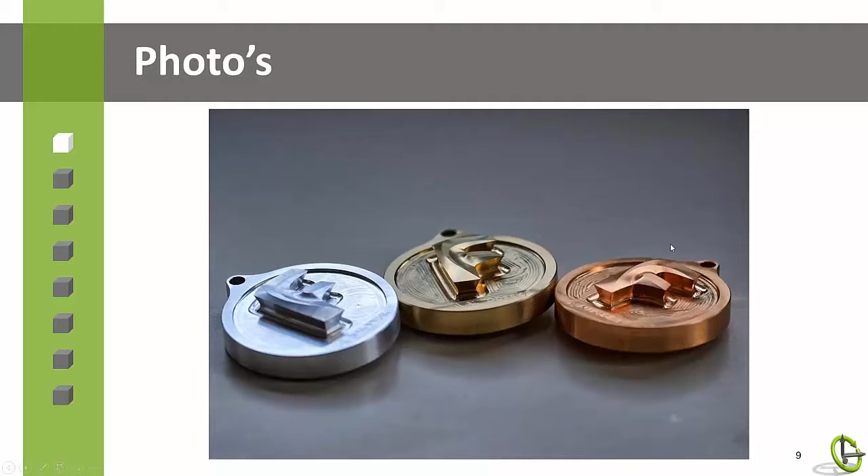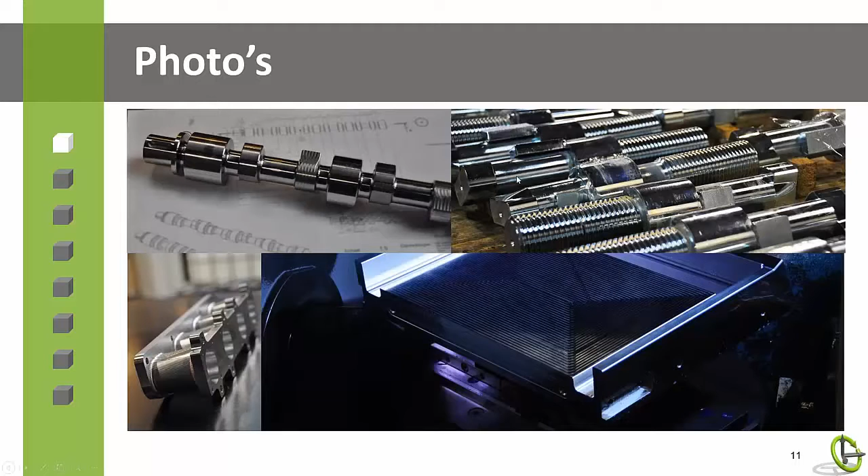You might find that weird, but they usually do anything to get a discount. So if you say, I will make it for you for a slightly lower price, but I want to be able to show it to the world, they tend to say yes quite easily, whereas others are way more scared of their products being shown. So that's why you see a lot of motorsport items here. But we make a ton of different stuff as well, some of which you see here at the bottom right hand corner. That's totally not motorsport. It's a part for the offshore. What they're going to do, I've got no clue, but they wanted it like this, so we made it.

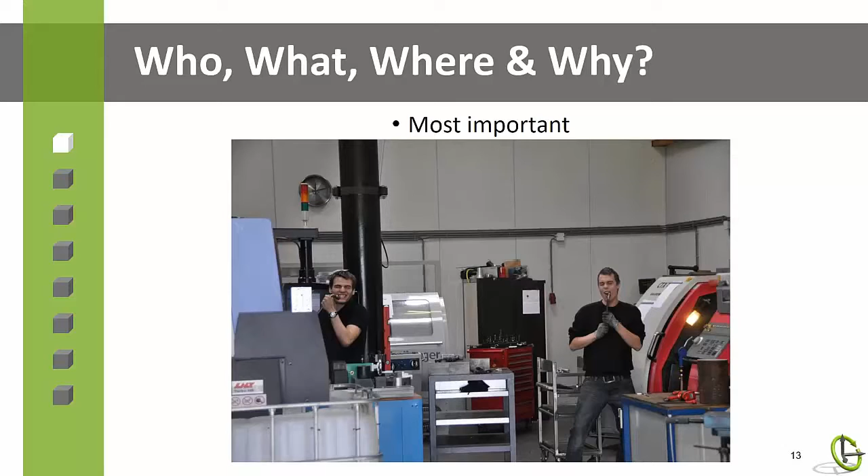But in the end, it's not about what you make or what you do, but having fun. So you see me here on the left, and one of my colleagues, Mark, here on the right, in the old shop, singing when the radio was on, and it really shows what we try and do. It's not all about work, but it's about having fun while doing it. So we actually all like to go to work in the morning. Of course, there are days where it's hard to get up, but it's more than just work for us usually.

So, on to the actual stuff that most of you came here for. So, let's do it. All right.

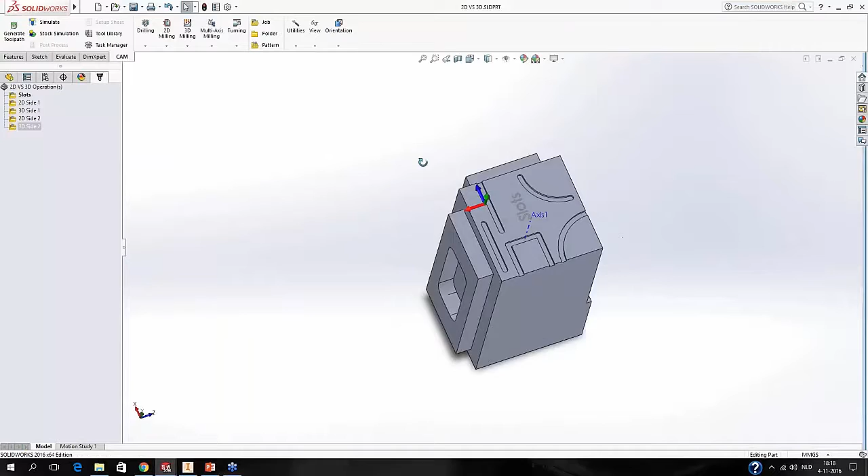Everyone's gonna see slots when they start making parts, and they tend to change a lot for what kind of products you're making. But I try to pick some on how we could program them. Of course, there's this slotting operation we've got, and we'll select the tool. I've tested it before, so that's why the tool's already the correct one. We just hit generate, and it should be good to go. This is an easy one, most people will understand, and I think it's just a very good operation.

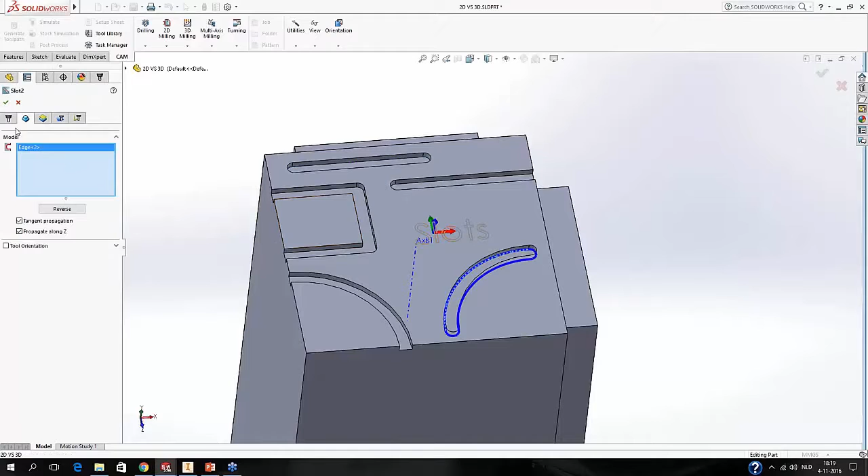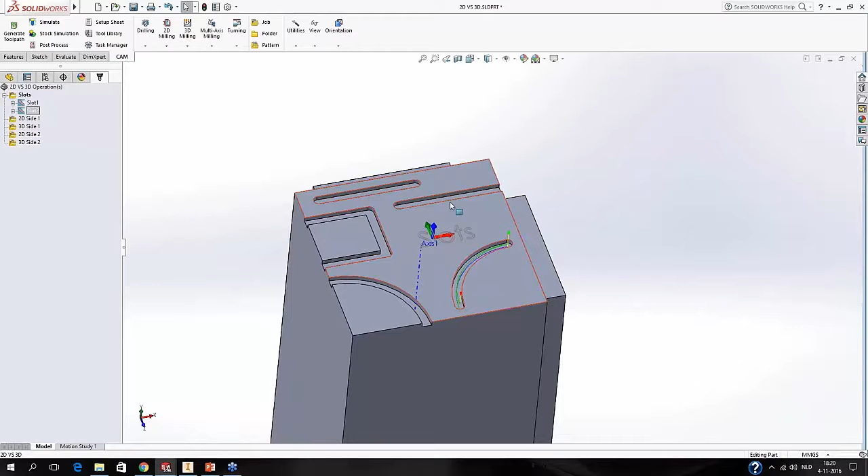Now, if we want to make this curved slot, you might think, is this going to work? Of course it is. So we're going to try and make that one. The selections are a little different between HSMWorks and Inventor HSM, but usually the workflow is kind of the same. So what you can do here in HSMWorks, which I just did, and you can also do in Inventor HSM, I believe, is use a way to duplicate it, which has got a shortcut here, and that way you can make the same operation again, and usually I have to change the selections and have a ready operation.

From here on, the slots get a little more tricky. We've got an open one right here, and this is something that requires some knowledge to create well. Some users might say, I'm going to use a 2D contour for this. You can, because that's the easiest way to hack yourself to the correct toolpath. But actually, the slotting operation is much smarter than you might expect.

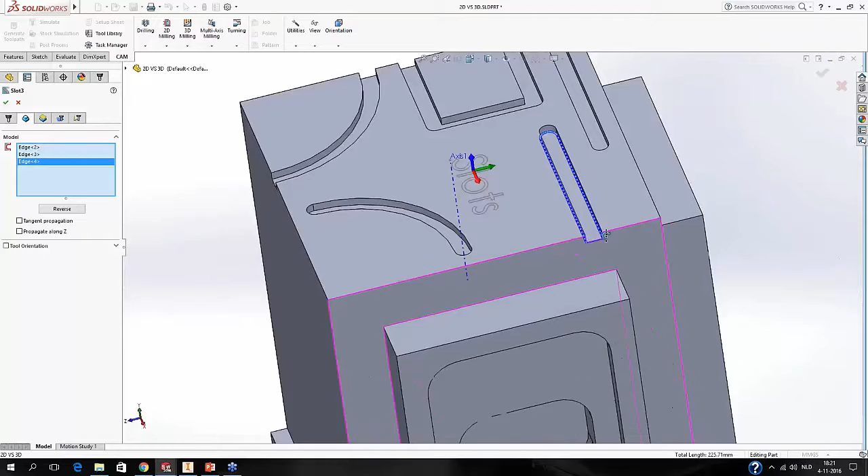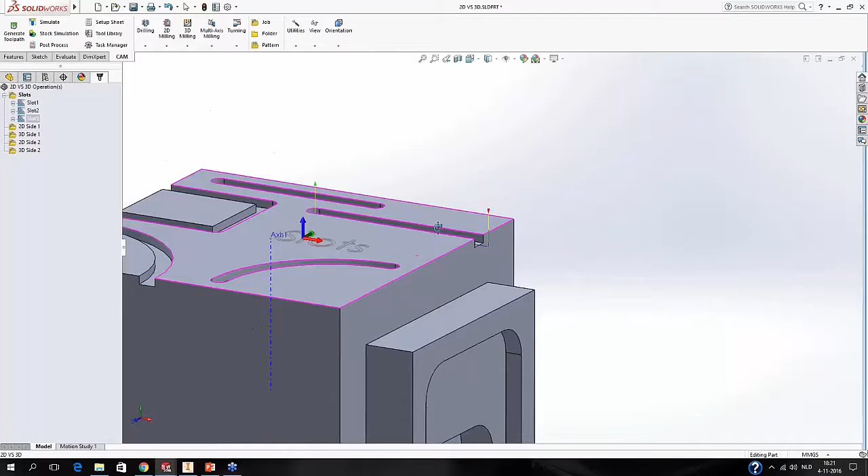And what happens here with the selection, if you take this one away, we'll turn these two off, and we'll select this one edge, the one over here, and the one over here. You'll see these 3 lines that I clicked have gotten a little thicker, and there's a small blue line here on the end of the slot, and it shows how it closed the slot for us. If we press the green button right now, the slot will actually generate and will understand that it's an open slot, and it can just plunge right in, cut to the end, and come back up again on the other side. So a real easy way to get this open slot.

It also works in Inventor right now, but there's a small catch, since if you regenerate it afterwards, the system will go haywire. So that has been sent in. There is a ticket for this in the system, and the development guys will fix it. Don't expect this to be tomorrow, but it could be. It also could take some time.

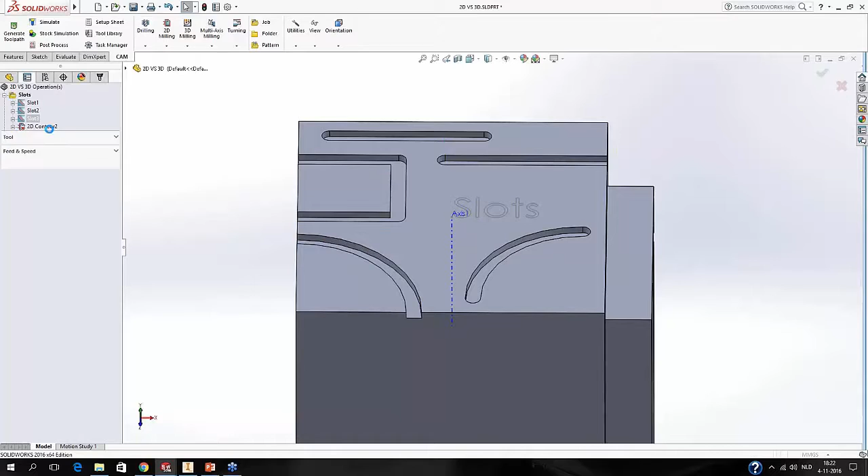Then these 3 slots we've seen right now are quite easy to program, and they're also easy to do in your mind. But these ones, this one and this one, are a little more tricky to get right. Here we are going to use a 2D contour, and still the same tool, that's all fine. We're going to click one of those edges. If we do that right now, we get the full slot, which we don't need, and we've got this edge selected right now.

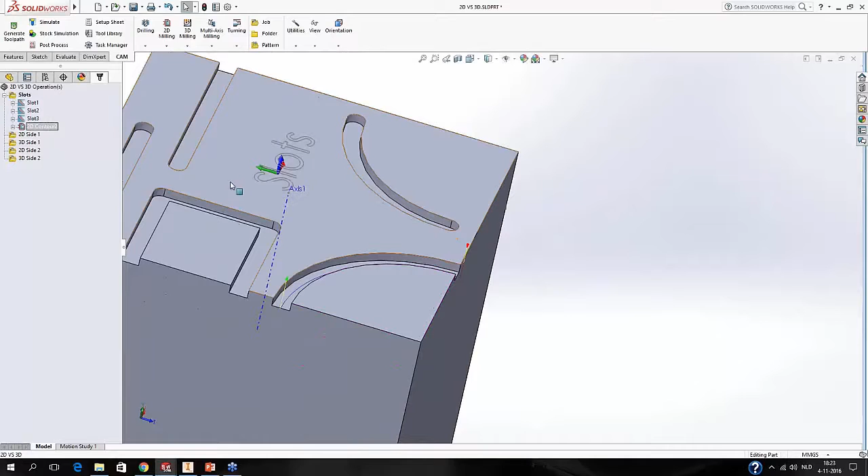To get this right, we need to turn the lead in and lead out off, or at least take this 90 degrees off. So the lead in and lead out will not cut into our actual part. Now if we do this, the actual cutting path looks quite good, but we have a problem with the tool plunging into the stock we've got, because it doesn't move out of the stock far enough before it starts the cutting. Again, there's a whole lot of ways of getting this right.

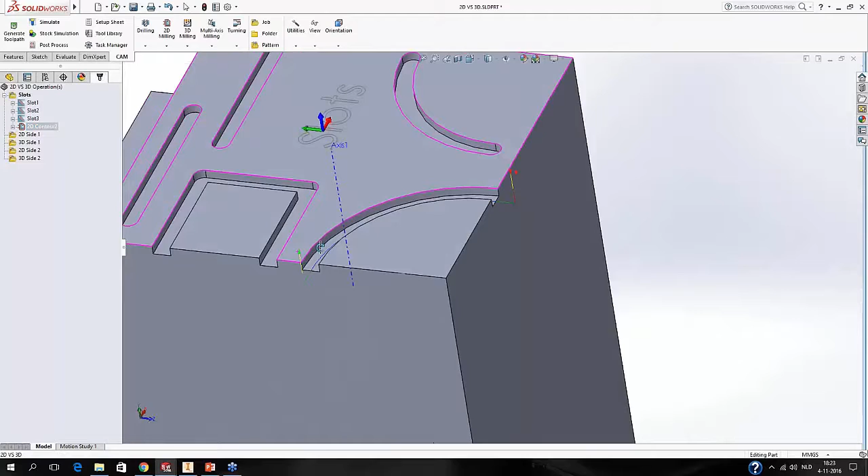We can extend the lead in this case, to 10 for example, and as it shows you right now, if we simulate this, you can see the tool starts outside of the part, cuts right in, leaves the part before it comes up. We can, but this gets a little tricky when we are not sure how much stock is left on this side. So we're going to put this back to its normal value, and we're going to turn on the stock contours. If we do this, we see this orange box which shows us the stock that has been set up in our job.

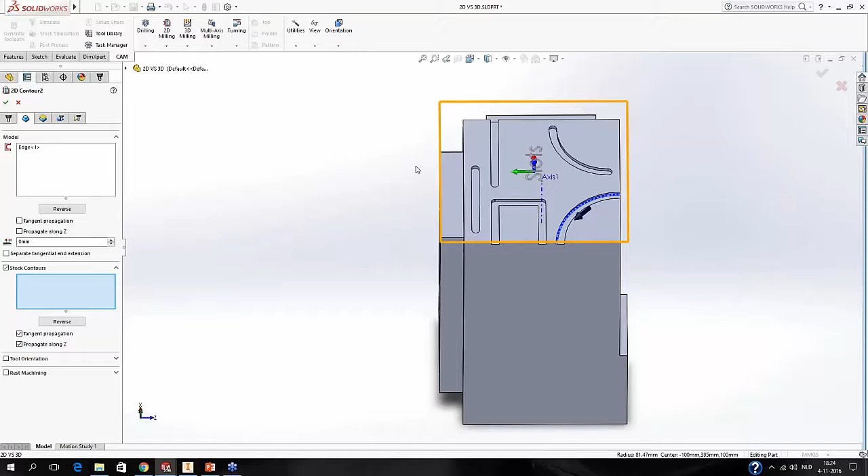This is called a job in HSMWorks and a setup in Inventor HSM, but it's the same thing. This orange box is now shown here. We can also override it when we do a selection here. That would mean this is our stock, but usually your orange box will be fine.

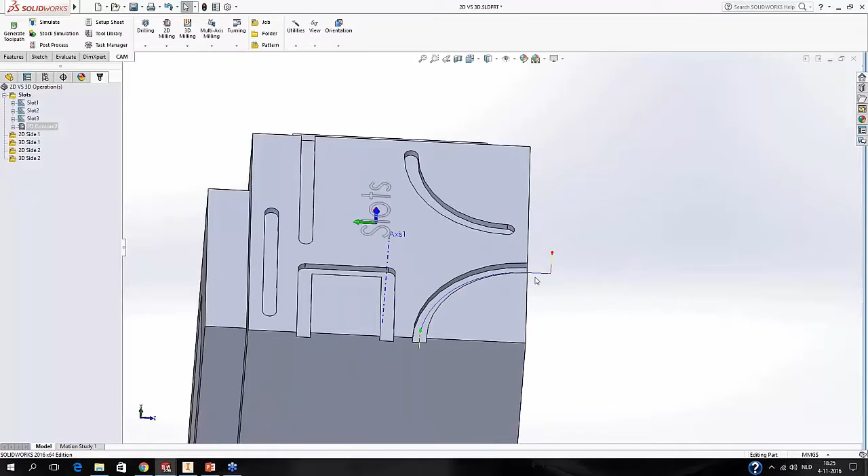If we hit the green button right now, this should all work fine, since we see now the actual cutting move is extended beyond the whole stock, and it will plunge there and come out. You see that it made more of an extension right here than on the other side. That's due to there being more stock on this side than on the other one. For now, this seems pretty easy and straightforward.

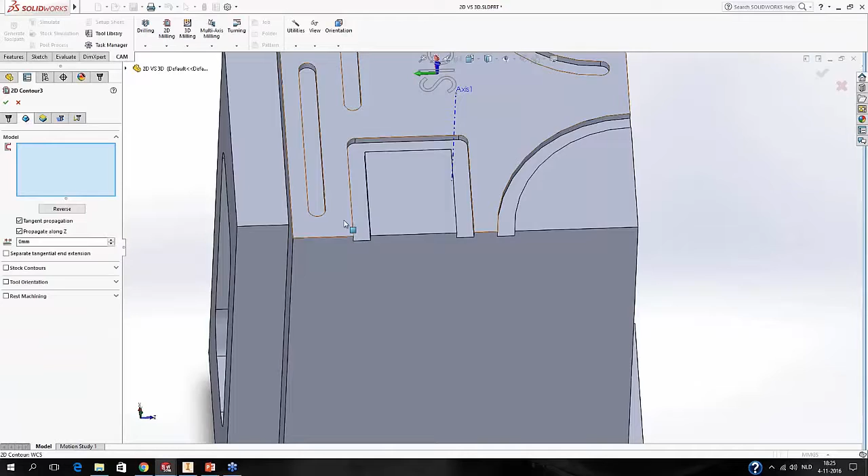Now we come to the last one, and this one is much more tricky than you might actually think. If we take a 2D contour here, and if we select this edge, we can also select the end of this line to make it stop the selection. You could think, well, if we turn on the stock contours again, it should make a fine path.

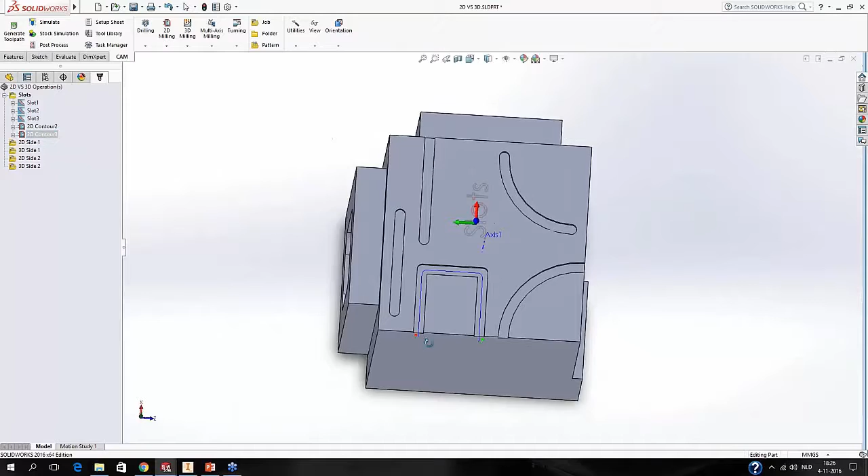Well, by the looks of it, it's pretty good. Only if we simulate it now, we will see that it plunges outside, it will cut straight in and come to the other side. This looks okay, but if we do the comparison right now, we actually see that it has left some stock here in the corners.

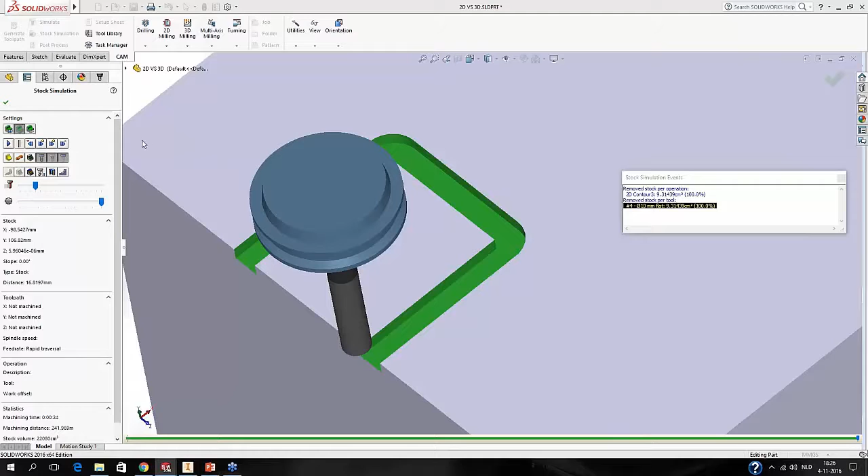If I'm going too fast with this, please tell me, because for me this is really easy and I do this every day. But you can compare the current stock that has been machined to the actual model we've got, which is what I'm doing right here. Gray is what is actually the same as the model. Blue is where there's too much stock left still, and red is where you've got into the model.

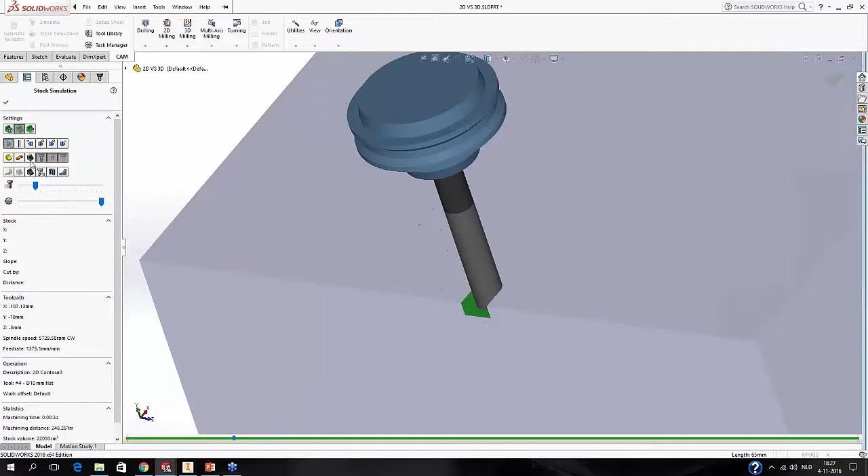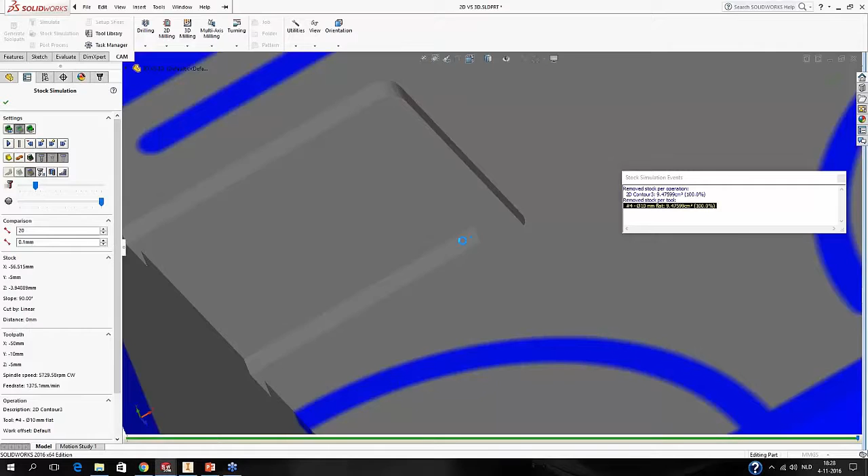So we see now we've left these corners right here. This is due to the tool running around this corner right here, and we can do a couple of things. The easiest one probably is to not select the inner edge but the outer one. And if we do this and we simulate it, you will see that now actually the corners are just gray like we want them, and the inside of this slot is still good as well. So with that in mind, it's usually easier to do just this.

Well, we could have also set the rolling around the corners off, which we can do right here. Roll around corner, and we say keep sharp corner. If we do this, we should get the same kind of path that allows us to cut this slot in one go. If we check on that, because you can also question me on if I'm right, no problem. And as you see, this is good as well.

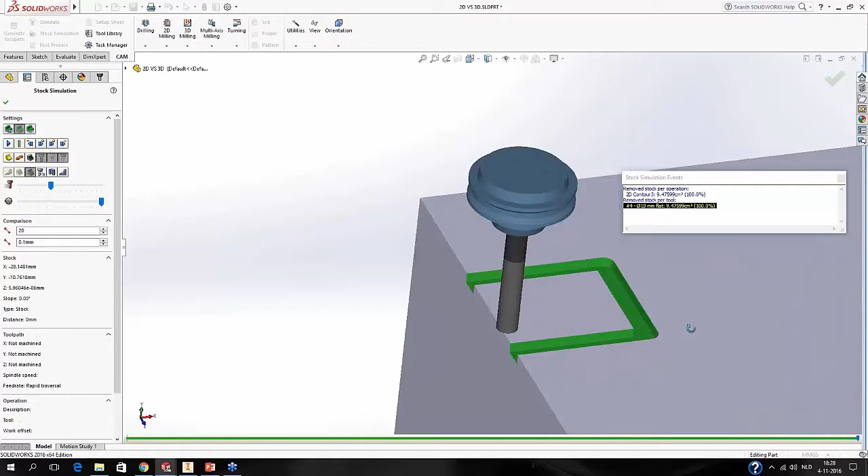Sometimes you see a little discoloration here of it being red, but that's due to the quality of our simulation and the comparison settings, which I will not go into, but you can fiddle around with them yourself. That's it for slots from me. I'm not sure if any of the guys want to interrupt me at this point.

The only thing I'll say, Lawrence, I like how you showed how you can use stock. Obviously, that's applicable to all of the 2D operations, but an often missed thing is adding the stock contours in to affect your 2D toolpath, so I'm glad you brought that up. All right.

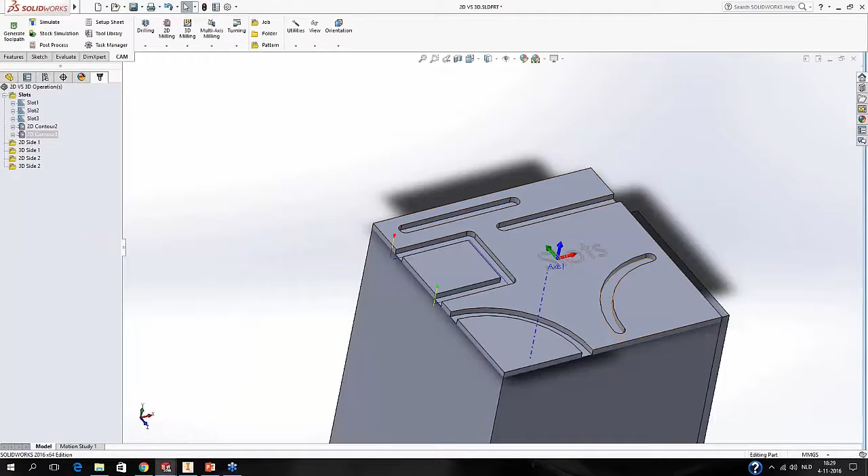I think the next thing, I didn't put it back on here again, but I'm going to explain something about the extension we can also do, which I showed you before here as well. But there's something funny about this. We can extend the toolpath if we want to. So let me create a new job. And set, this is my top. Yeah. All right.

Automatically it will set this new job we made to the default one, which we're going to put operations in, which is very convenient. It's one of the things that you don't actually see, but it's been really thought through by the development team. So let me show what I'm on about here.

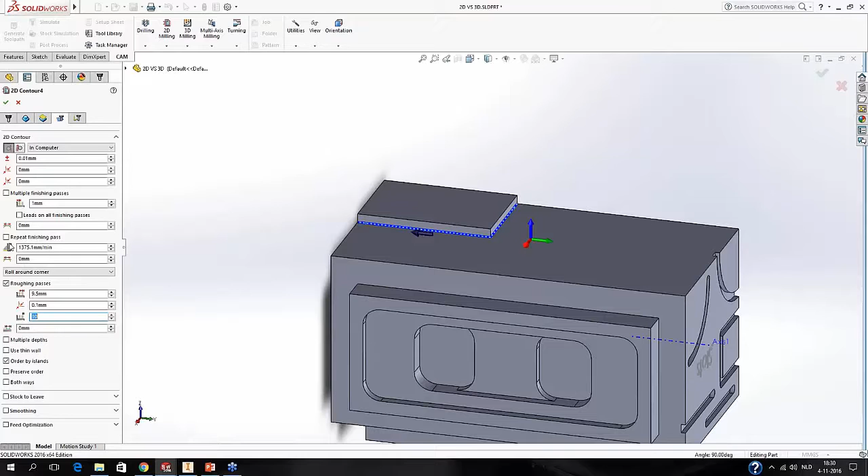What we can actually just do is create some kind of open pocket with the 2D contour here, and create some roughing passes as well. Let me first give in 10, and we can see what happens. It will just create this toolpath around the edge that I selected.

Since it keeps offsetting this part, we get these round corners here at the bottom. This is good for the actual cutting. It might look weird if you're not really used to seeing a machine run or programming, but this is actually how you want the path to look if you are using it as an open pocket.

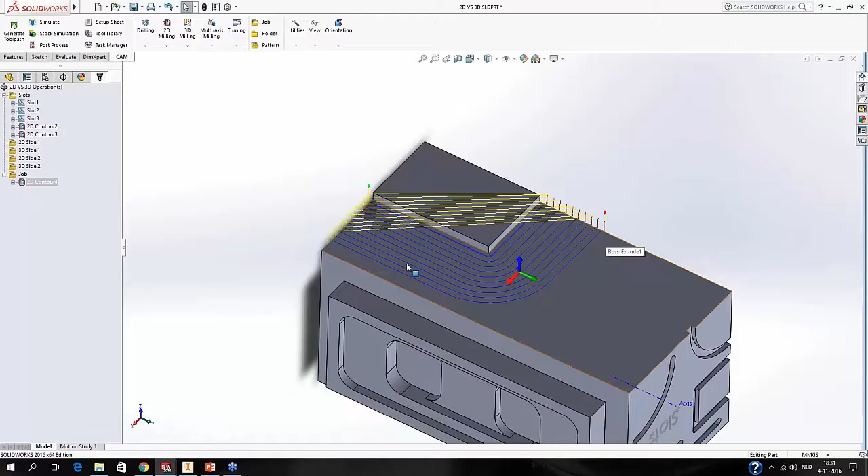Again, here we see that the tool will be plunging into our stock. If I select the job right now, you'll see this yellow box, and that's actually the stock we've given it. If we look at where the toolpath is at this very moment, this is the center of the tool that's being programmed, so we know it's going to plunge right into the stock. We can simulate that as well. And we see it will plunge straight in.

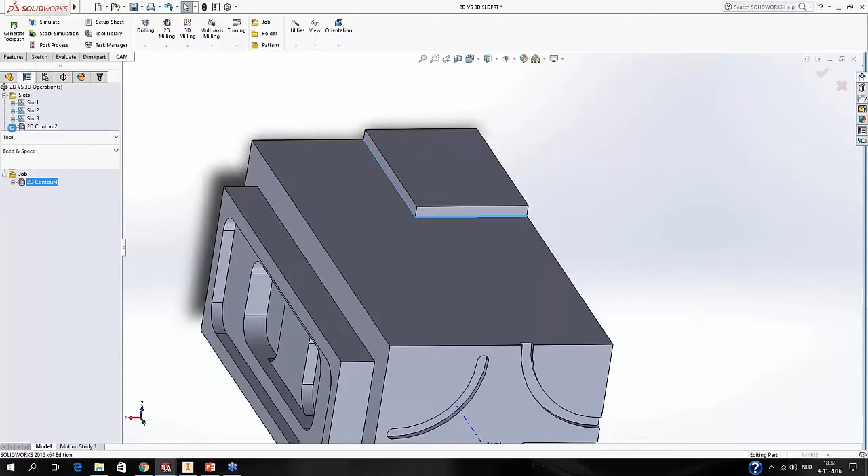Since this is not what we want, we are going to extend the toolpath. To do this, we've got here an end extension box. It will extend the toolpath, like it says, tangent to the actual move that it did at last. So if we would give in here at least half the diameter of the tool, we should be good. So the tool is 10 millimeters, so I'm going to fill in 6.

I'm sorry for you guys that I'm doing this in millimeters, but that is my world, so that's much easier for me. As you can see now, this blue line has been extended to outside of the part and outside of the stock, which we should be able to see clearly when we're doing this simulation.

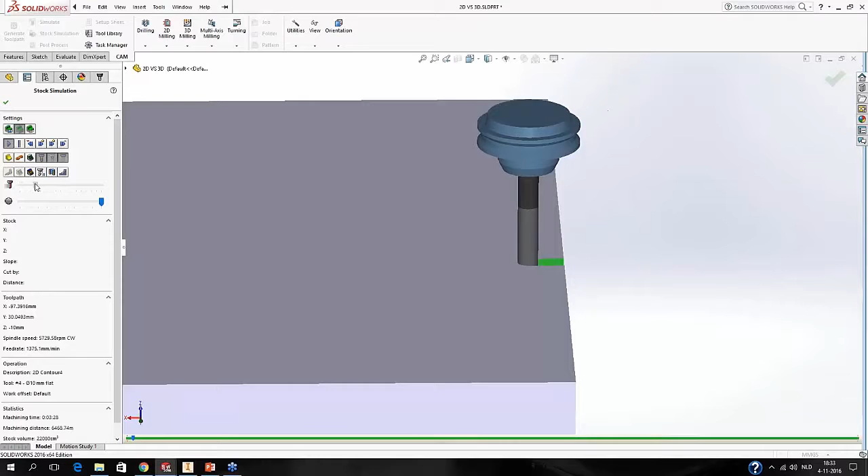As I know this is now doing something like a full slot, this is not my roughing operation. I'm just trying to show you how we could do this kind of open pocket. To do this correctly, you're going to say, yeah, but we got to machine this whole face. Now we can just say, all right, we need a lot more passes. We give this in 20. It will give me 20 passes.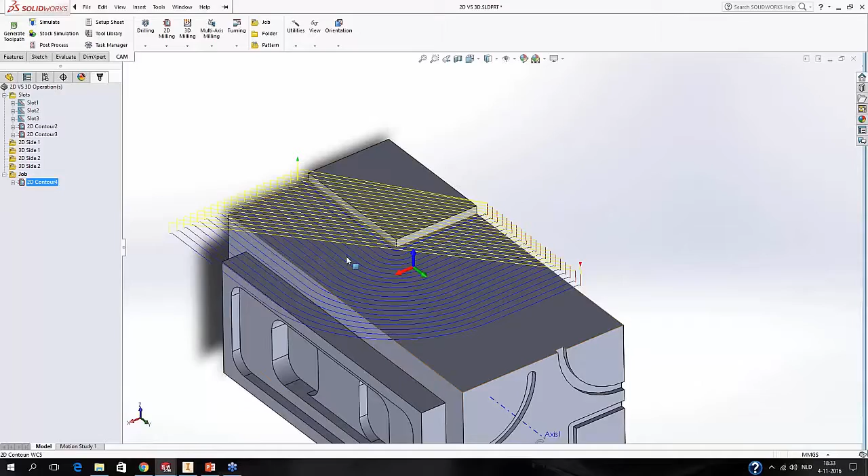This will also show you that we're cutting way too much here because it's all going to be just air. Well, it's actually going there, it's just going to cut air, which you should be able to see here. It's just moving in the air, and that's something we don't want even when we're not programming an adaptive toolpath. We never want air cuts.

So what is going to make life a whole lot easier for us is turning on the stock contours again. It's going to show you the orange box again, which is exactly the stock we've got. So this is good. To be sure, we are going to extend all the passes over the whole part here. What I usually do is just fill in something like 100.

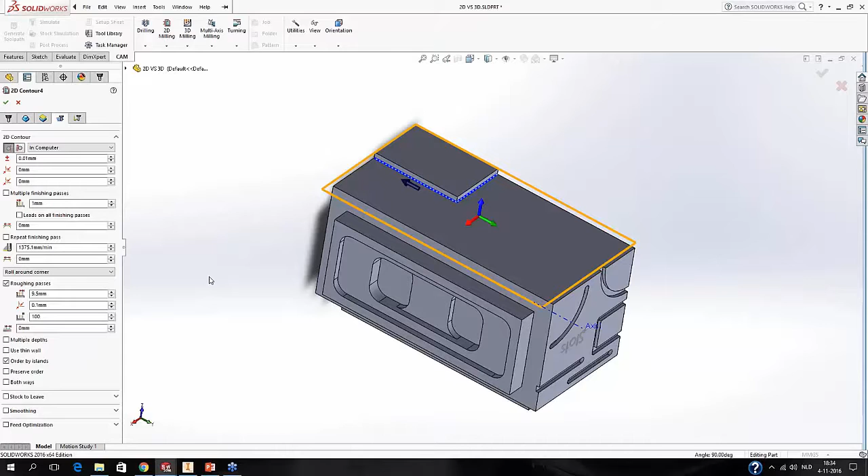My computer is a little slow since we've got the GoToMeeting open and Inventor HSM open, SolidWorks open, but usually this is not really hard on your computer and the calculation time is real short, so you don't have to be scared that you're putting in too many.

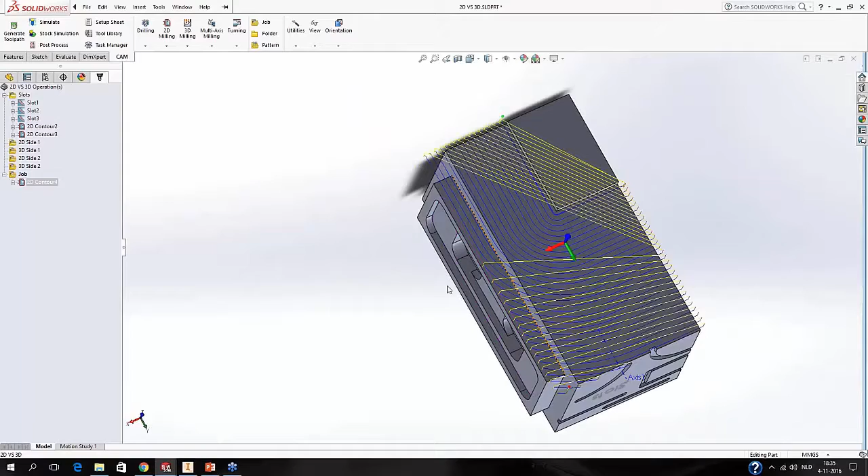As you see now, these cutting passes are cut before they start cutting air. This is something we would want in theory. Now the thing comes that in the machine this block might actually not be exactly as we've defined in our system. To prepare for that, we might say we want to extend the toolpath just like we did before, just outside of the part a little more, so we're sure it will plunge outside of the part.

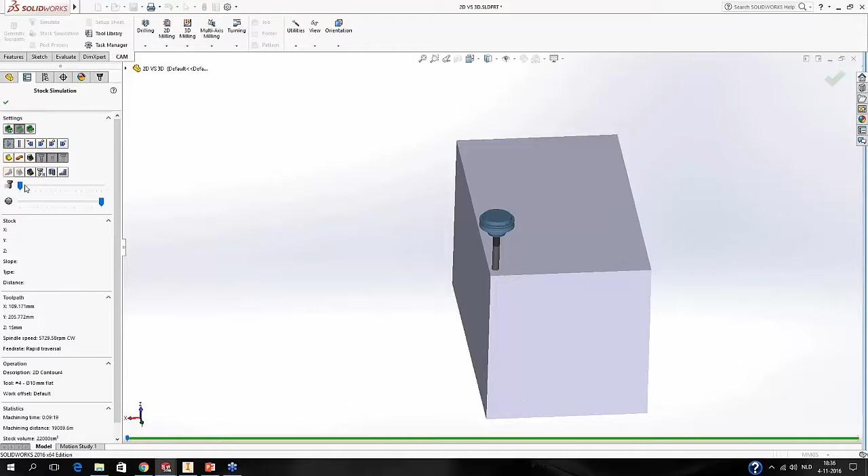Now you will see that I've left here this extension distance in the end. But from the other simulation, I can show you that it's not actually moving more than 6 millimeters, that's an extra 6 millimeters out of the part, just to be sure for this clearance that I would want.

This is because the extension distance you see here at this point is extending the passes, but these passes are still allowed to be cut by the stock contour, since it would say to the passes, you're going outside of the stock, so there's no need for this extension. We can put this one back to 0 or leave it at whatever you want, it doesn't really matter.

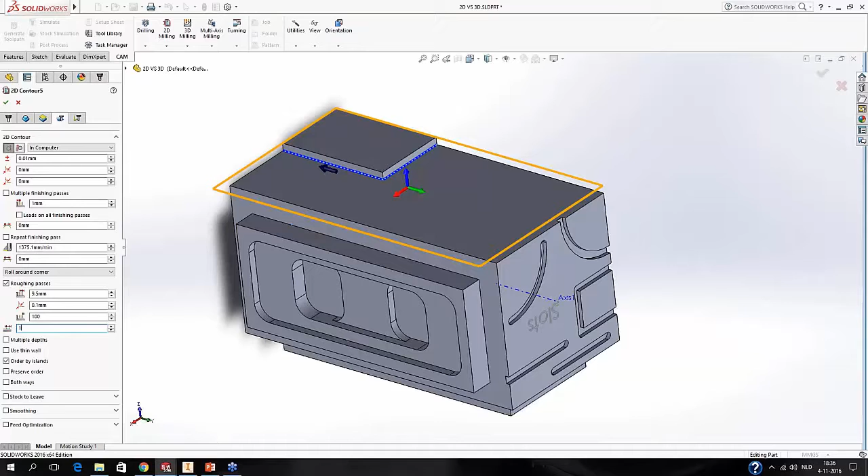There's another box right here which usually gets no one's attention, but it's got a lot of power. If you put 10 millimeters in here, you'll see that the path actually is extended beyond the given stock contours we've got before. This is the one with the extension distance in the first tab, and this is the one in the cutting passes tab.

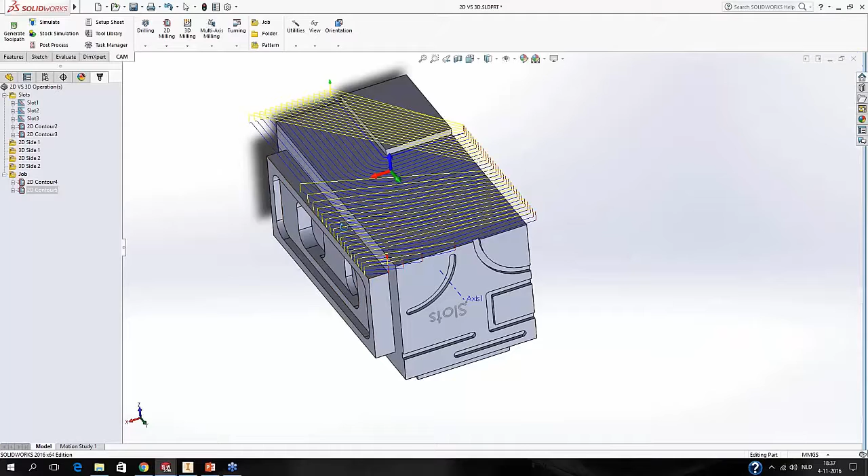This is something that took me quite a while to find out, but it's really useful when you're cutting pre-cut stock from a laser or a plasma cutting machine, or even a mold for something. So, quite easy to use, 2D paths, but that's a good thing about 2D paths. You can manipulate them in any way you want.

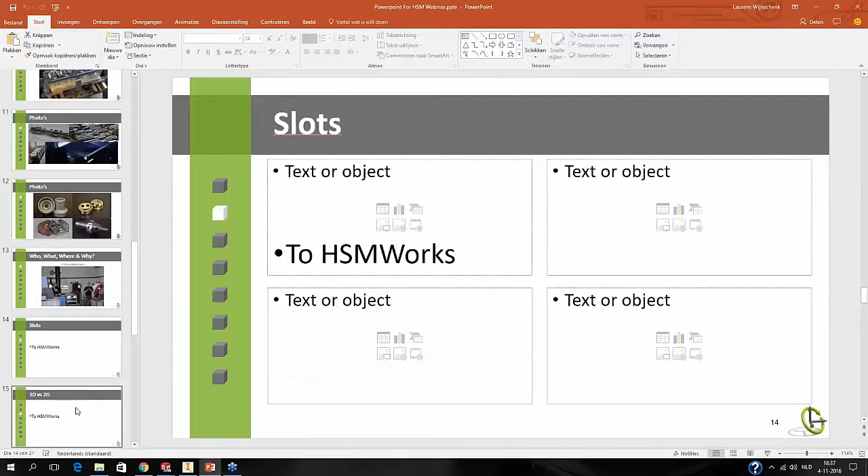From here, as we see in my fantastic PowerPoint, we're going to do something about 3D versus 2D operations. Let me move this job up for you. So we're making this one the default folder, and from here on all the toolpaths I make are going to be put in that job or setup.

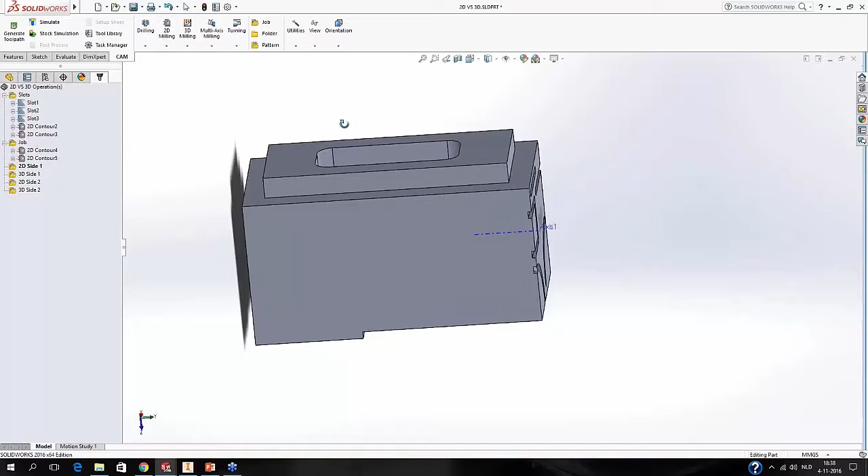This looks like a real easy part. So what I would usually do is face it off. Let's see if we can find a bigger cutter than this, which I've got in here. No, that's a ball end mill, like that. All right. We'll face the top off, and from here on we want to actually machine this side.

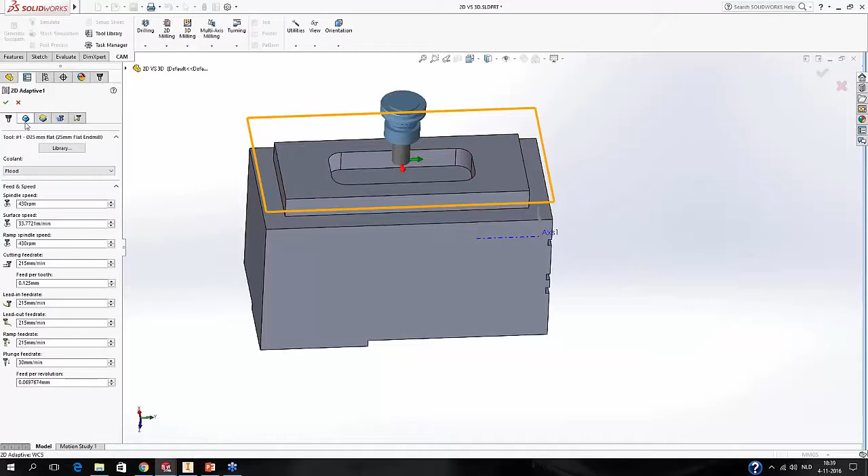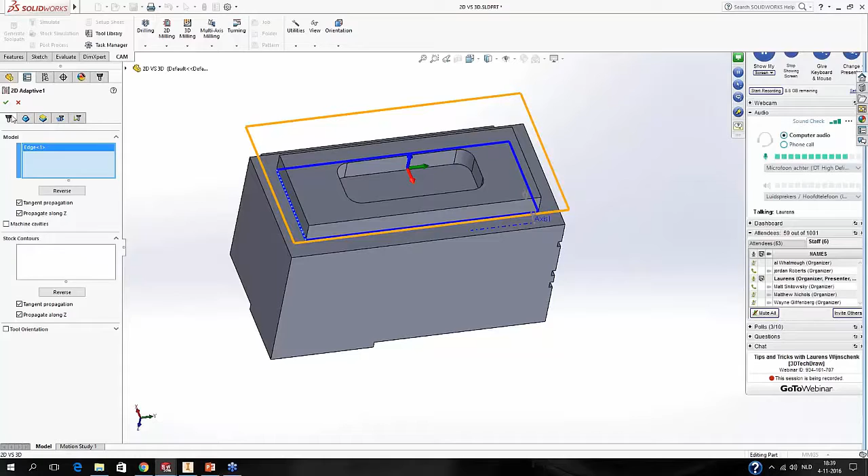Since it is such an easy part, we might think that the easiest way to do this is a 2D adaptive operation. Of course we can, there is no problem. We select the outside of the box we've got here, and after the stock contours turn on automatically, disable the machine cavities, and I believe we should be ready to go. As you can see, we've pre-machined the outside right now.

I didn't bother really much going into the cutting parameters, since a 25 millimeter tool will be able to cut 30 millimeters deep, and the 40% stepover usually is a good guess if you're not sure where to start, if you ask me, but that might be different for everyone.

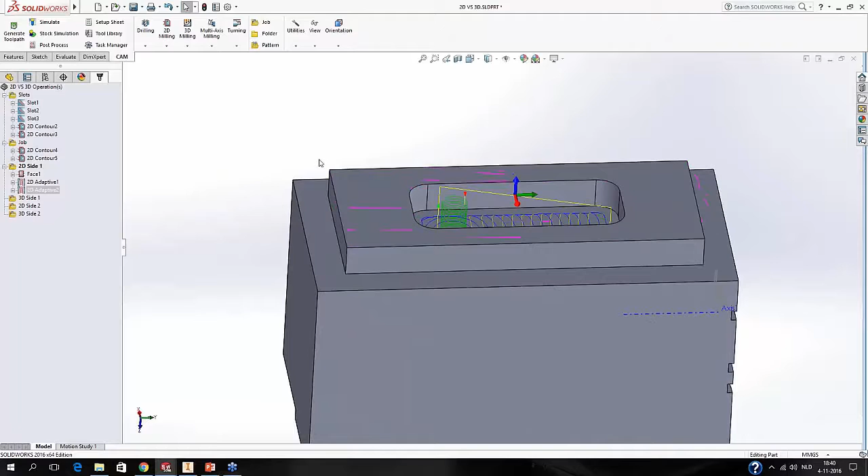The trick is now we also got to machine the inside. We can duplicate this and start cutting the inside. The only difference is we turn on machine cavity selection, select the inside, and we have pre-machined the inside. The machine will automatically know that we're cutting into the inside of the part, so it will have to use a helix to go in. You can overrule this, but in 9 out of 10 cases this is the kind of entry you would want.

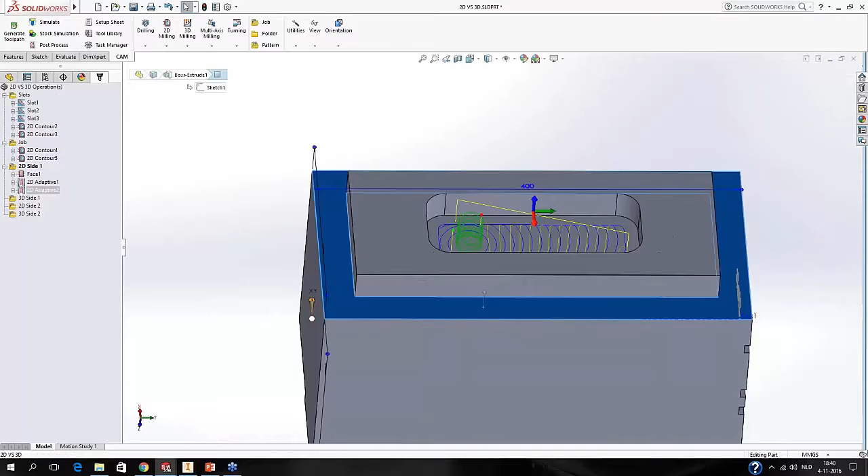After this we can finish the path with something we did before, like the 2D contour, and finish this floor, use another 2D contour to finish the side, and the same for this inside. So let us do that real quick.

Also, if you are actually an HSMWorks user, please look at the way I click the lines and boundaries. If I click on the end of a line, you'll see the arrow being on the inside of the square. If I click on the beginning, it will be on the outside. So all the clicks on which side of a line are intentional to get this right. Turn the stock contours on.

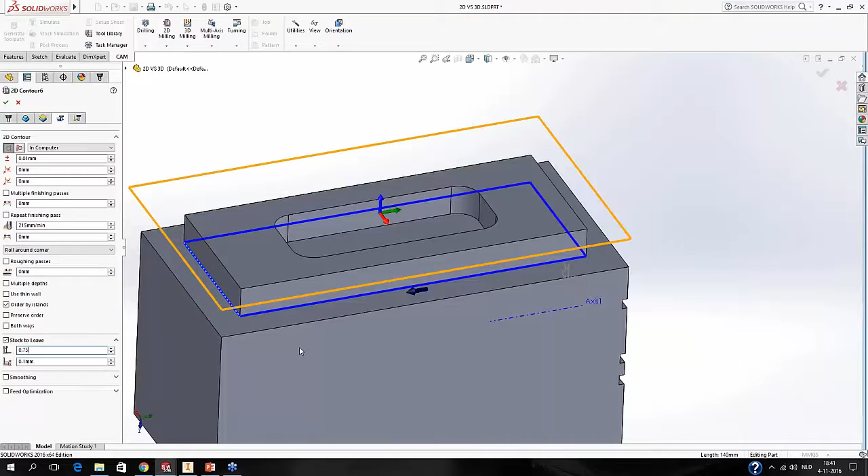Usually I would want to leave something on the side in this case, and not on the floor, so I can fully finish the whole wall with another toolpath. Turn on the roughing passes, make it 10 wide. We've got a finishing pass here. We can also make that the same as the roughing passes. And like this, we've finished the floor here.

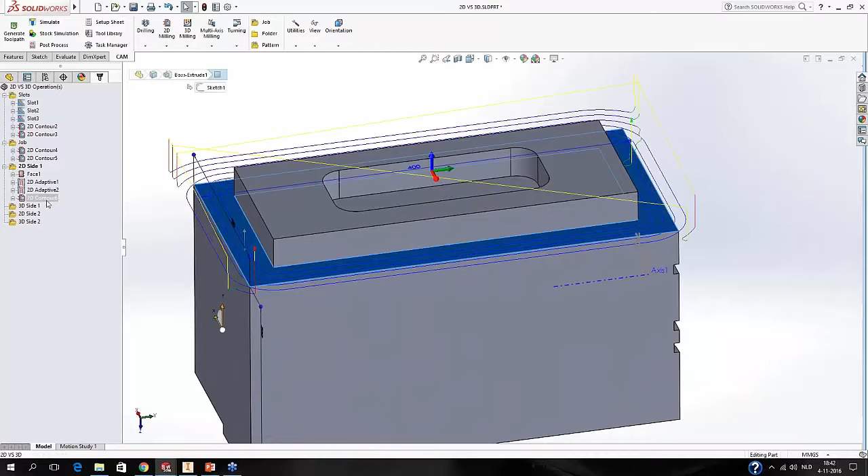What we could actually do here is use the same for the inside, but it will plunge into the last bit of stock that we've left with the 2D adaptive. So for there, I would suggest going for a pocket routine with actually the same kind of settings. Those don't really matter in this case since we're only finishing the floor. So that should actually be pretty easy and good.

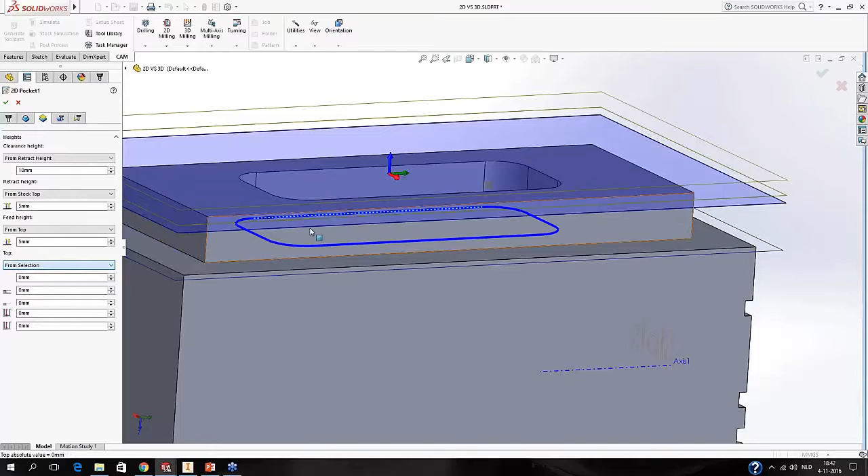It is gonna start at the top of this stock. That's how it's usually set. We can set this top to 0.5 from here because that's what I left on the floor with the 2D adaptive. That's a standard setting, so you can usually expect something like that. And with this, we've got the floors covered, and now we can start finishing the side walls.

You can do two clicks. We've got this one. You can change the cutter compensation type you want at this moment, and if you want to do multiple finishing passes or repeat the finishing pass. This is something I do quite often when I need to have a perfect size and finish on the side wall. I repeat the finishing pass since the first time usually gives you some kind of deflection on the tool. So for getting the size quite right, it's usually quite easy to use the repeat finishing pass.

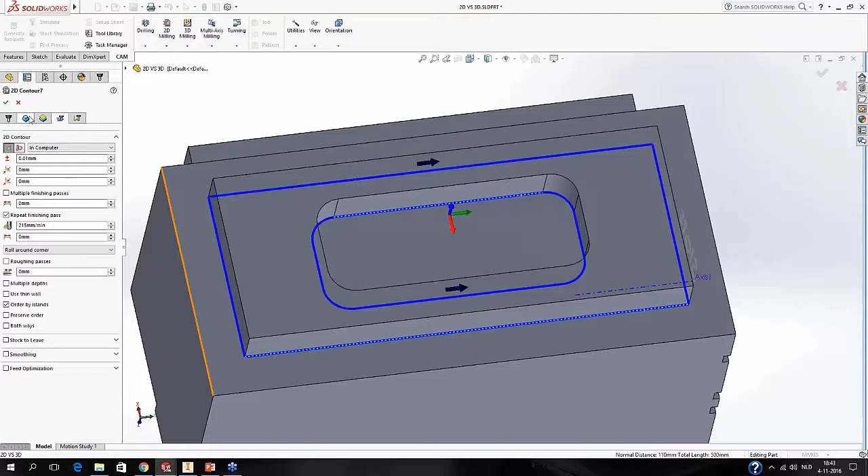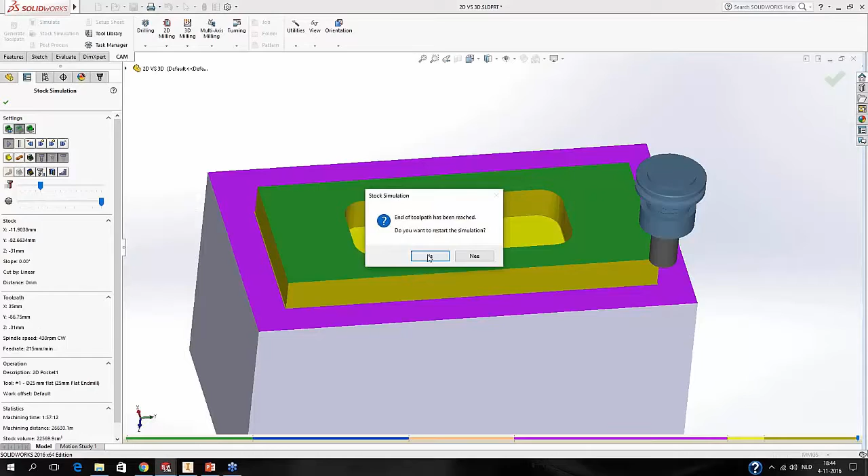From here on, we have actually machined this side with 2D operations how you would want it. Let us simulate it. That was a little quick. There are some buttons here in the simulation, like I want to generate the stock until the next operation, because the facing is not something we want to look at for another hour. So we just click the button, you see it's finished, and then we can start it again by looking at the next operation. This is the 2D adaptive.

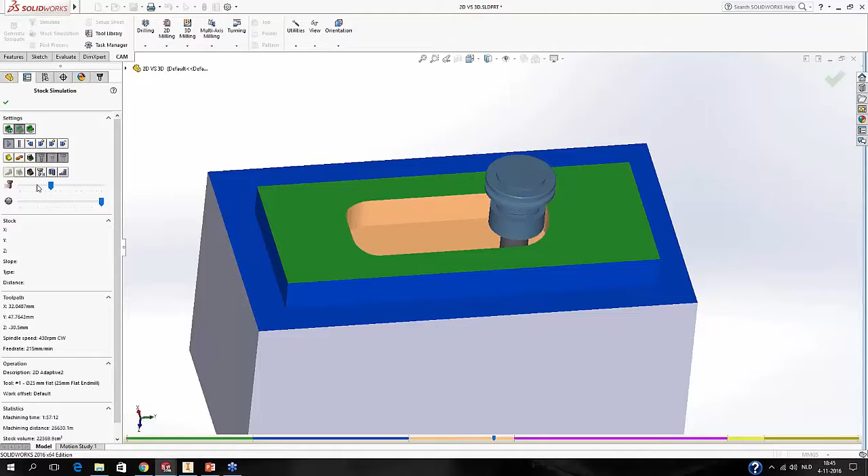Like I said, we didn't really bother looking at the cutting parameters, etc., but the operation itself usually knows what's best for you, so to speak. So this should be good. This is then the third operation we're doing to clear out the inside pocket with the same parameters, so don't shoot me for those. Now we're finishing the outside.

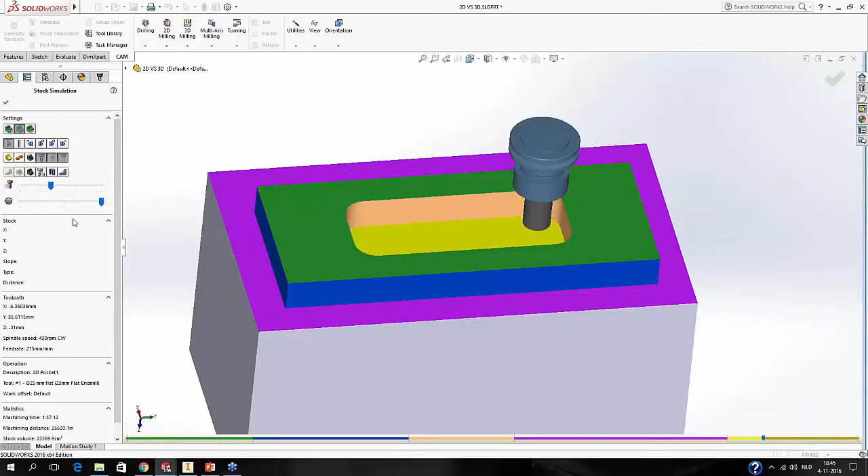Look at how much travel we've got of the tool, which is all retractions and airtime we in the end wouldn't want. So we'll need to improve on that if we want to actually sell this part to a customer, which we're not going to, but it would be nice actually to have something this easy for a change. Now we're cutting the side walls, or actually finishing them. And alright, this is good, and this is how most people start using Inventor HSM or HSMWorks. But I'm not real sure if this is the way to go if you're new to programming this.

We can do a whole lot of manipulating to 2D toolpaths, but if you ask me, the 3D toolpaths are a lot easier to get right. Since we want this inside and outside to be machined exactly the same way with the same kind of tool, we're going to use one 3D adaptive to get this right. I'm copying the facing because I still want my part faced, and for the first side of the part, facing is usually a good way to get it to this correct height.

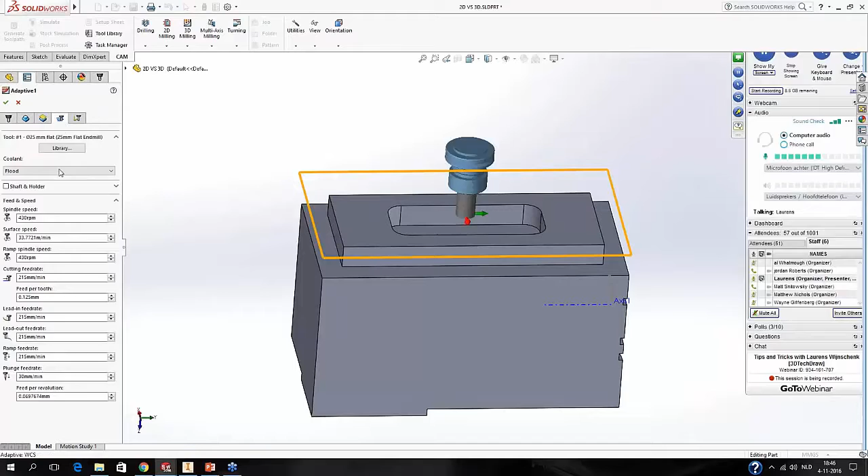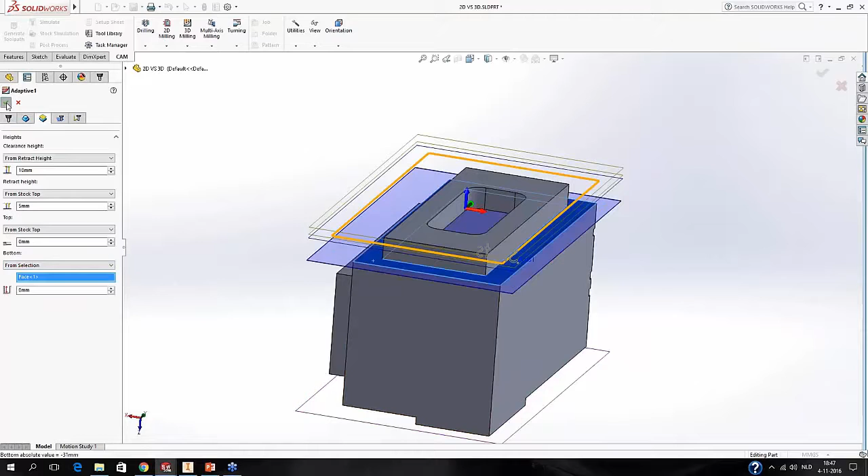From here on we go to the 3D adaptive, and we left the cutting parameters in the original one. We're going to do this here as well. Only thing is that now it doesn't know till what height we would want to machine this. So if we click generate, it's going to go to the bottom of the model, which is the usual setting. In this case we don't want it, so we're going to put it here. And if we click generate now, we've done one click versus how many we've done before, and we're machining this part.

Now there's one thing: the 3D adaptive will automatically set a cutting depth. This is something that on my own computer at work I've got all kinds of defaults for, with 7/8 of the flute length, for example. I haven't got that system here, but we'll put this now to 30, and since this is 31 long, we'll put it at 35, and it should also make one pass like we've done in the 2D adaptive. You can see it being generated here. It takes a little longer to generate in this case, since it also generates the inside pocket for us.

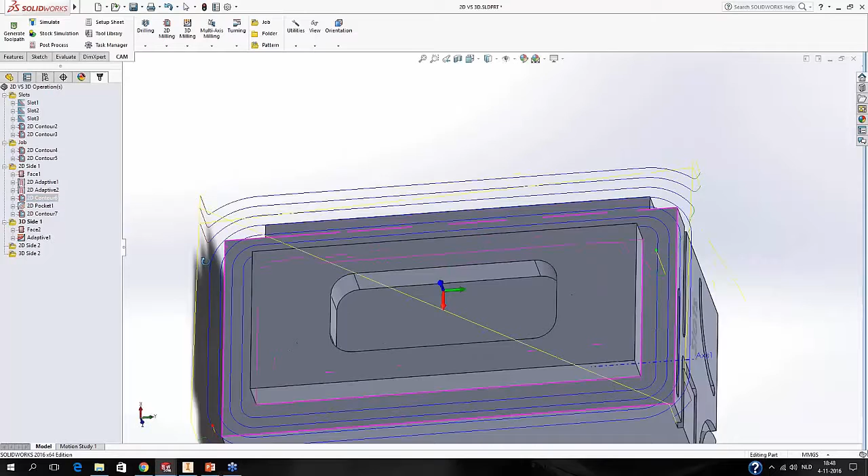So with a minimum amount of clicks, we've actually created the same kind of toolpath as we would have with these two 2D operations. Now we see here is the finishing that we did, and this means that I've got to make two operations, one pocket from the inside and some sort of open pocket on the outside. There's a horizontal toolpath in the 3D zone, and this will actually finish all flats, so to speak. To get this right, we wouldn't want to set the bottom again, because we don't want it to cut this side here, and we don't want to cut the top anymore, since we've already faced this off.

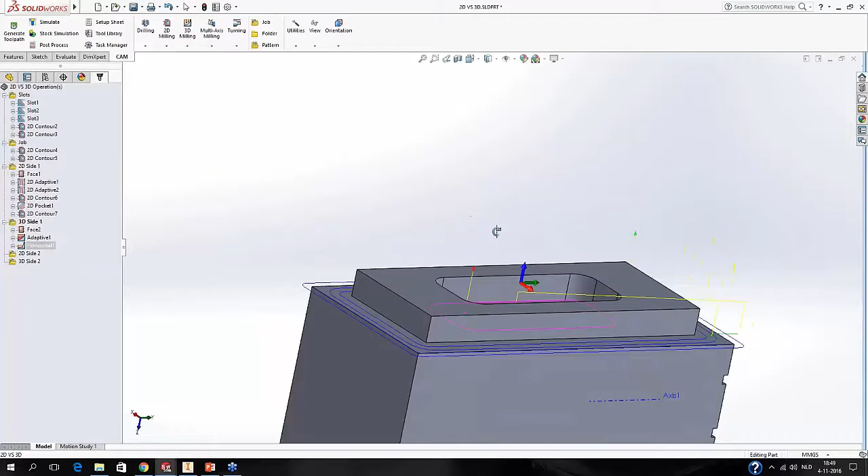Select the top, go a little beneath that, and from here on the system will take it from there. It will make the toolpath, finish it. It will also helix in here. You only see a very small helix, since I tell it there's only a very little amount of stock left,

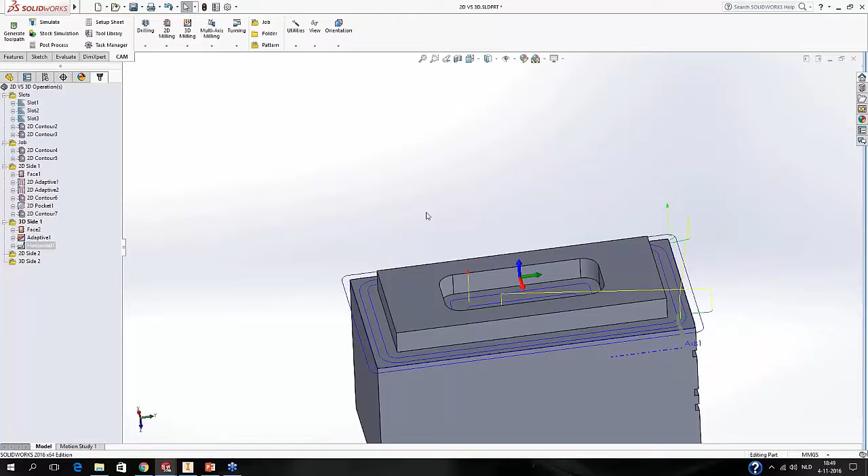and this is something you can control here on the linking tab, how much clearance height you want it to have before it starts cutting, and 1.05 in this case is usually enough for me, since we leave 0.5 as default, and that's something I use nearly every day. From here on I would usually use the 2D contour to finish this part up, since that's got the compensation type you can select, so we can just copy it to this one, and we've created the same side.

Only, if you ask me, with a lot less knowledge of actually how the program works, or actually programming knowledge, the only thing you actually have to do for the system is set the heights you want it to, versus selecting all the contours it needs to cut and overriding things like the model. So even if it looks like a 2D part, I would suggest going 3D for the roughing, and mostly for finishing as well, except for side walls.

Since that's something you want to keep the size, something you want to control on the machine usually, with the wear settings on the machine.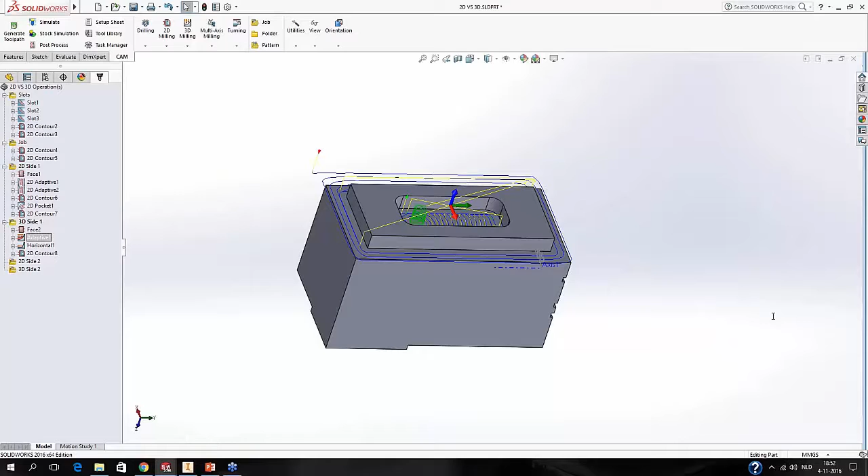But yeah, the question is, why do you use 2D contour, 2D pocket over horizontal? And I gave a little explanation over more control of the toolpath, but your perspective on this one would be good too. This was when I was explaining how we do this 2D way, and yeah, you could use the horizontal like I did afterwards, which I would usually do since the horizontal is very easy to program. And what I mean with that is I select the heights between which flats it should machine, and from there on I don't care about it anymore.

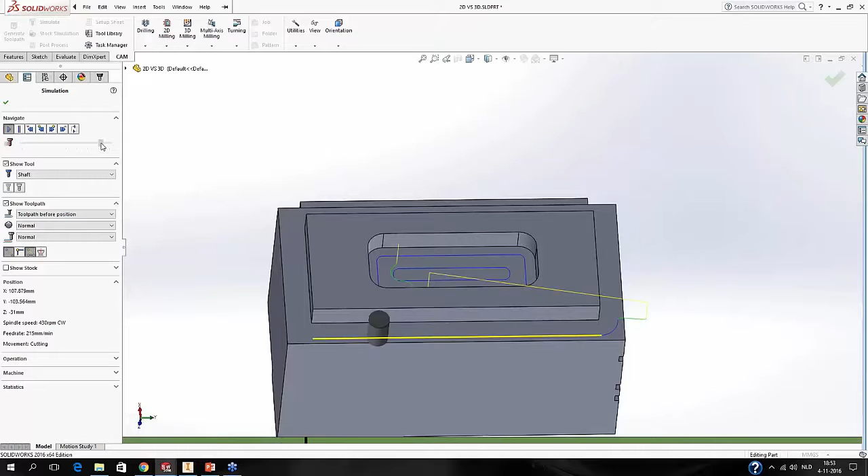But one thing that the horizontal also does is create an extra pass on the outside, for example. It's usually one of the last passes you see in the operation, and that is one that cuts air in many people's eyes, like this pass you see right here. And what you could actually do is replace this horizontal on the outside with a 2D pocket, which might be better if you're doing like real big series of parts, like more than 100 you need at least for this to be

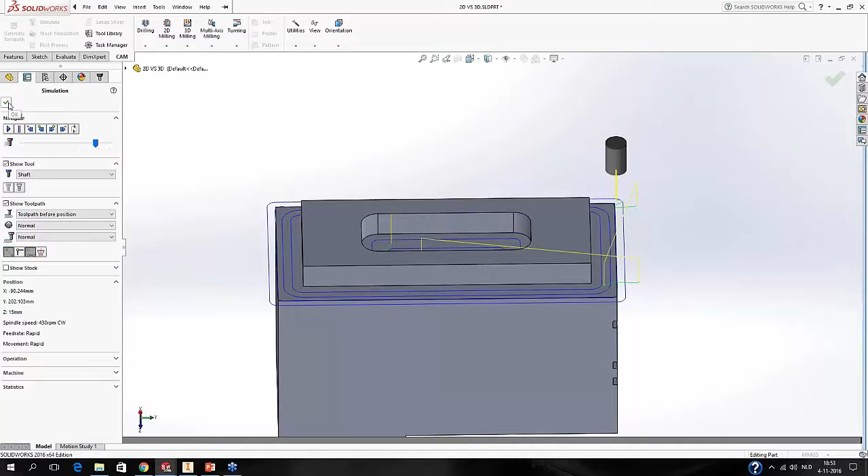something to consider, if you ask me, since it's much easier to program, and the more easy you make life for yourself when doing the programming, the quicker you're at the machine and producing these parts. And if something changes to the part, the 3D operations automatically change with you, whereas the selections of a 2D operation might not do.

So I think we have a great question here from Scott Moyse in New Zealand. I wonder what time of day it is for him now. He's asking, what are your favorite 3 power user shortcuts?

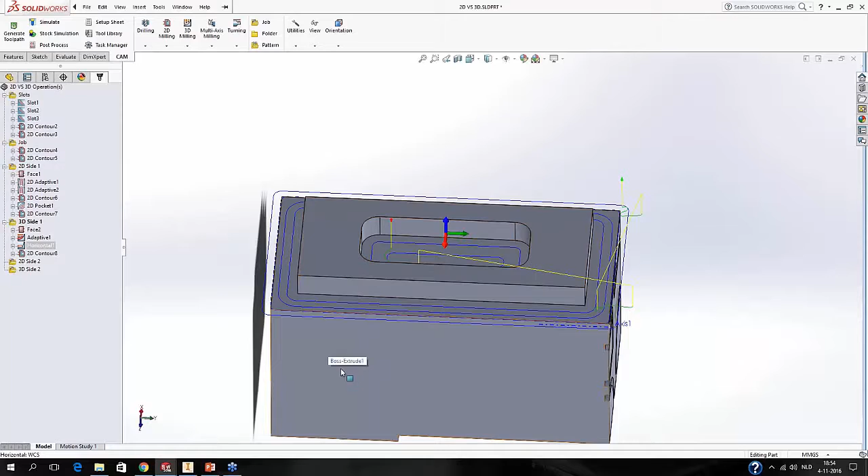This is a hard one if you ask me, because give us your top 10. If you're having trouble boiling it down to 3, then I think everybody... No, for me it's more, what do you mean with shortcuts? Do you mean like keyboard shortcuts, or are you looking for... What are the things that, because you've been using this product 6+ years, make you faster? Maybe things like the shift key, but it's hard because you do it every day, things that make you faster using the software that might not be immediately obvious to the users.

One of those things actually is copying selection from one operation to another. How I'm going to show you this is if I create another 2D contour right here, and we can actually copy all the geometry selections we've done in 2D contour 8 to number 9. And no, go away. How we do this is a little tricky at first, but it's real convenient afterwards, and that is using the Alt key and the Shift key.

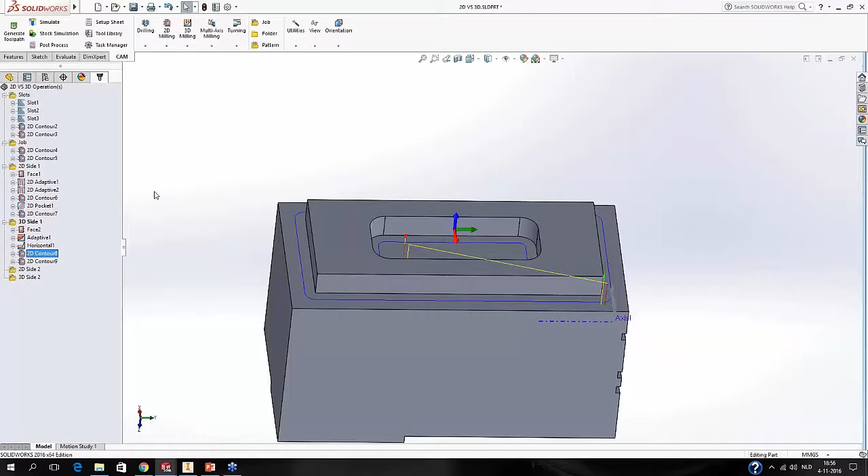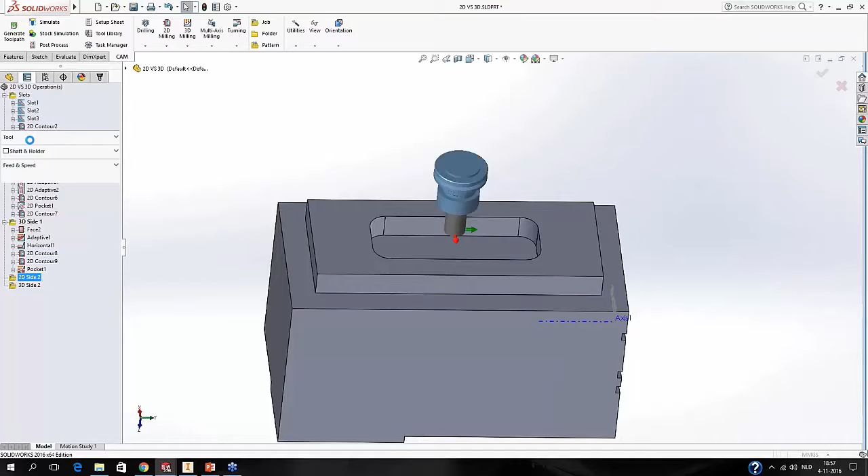If you then press those two and move it to the other one, it's going to ask you: do you want to copy all compatible geometry from one to another? This also works for 3D operations that have the same kind of boxes. So if you look at an adaptive clearing, it has machining boundary and stock contours. If both of those are in another operation as well, like the pocket clearing, it will copy both of them. If only machining boundary is available in the other one, it will only copy the machining boundary. So that's what it means with the compatible geometry.

So I'm glad you brought that one up. Of course, then the question started blowing up for me, when are we going to get that in Fusion and Inventor? And we do need to get it in the other two products. Yeah, this is especially one that Scott and myself have been on about on the forum, but we also know that you guys are usually quite busy implementing a whole lot of stuff in Inventor HSM and Fusion, and this is one of those things that have grown with the system in HSMWorks.

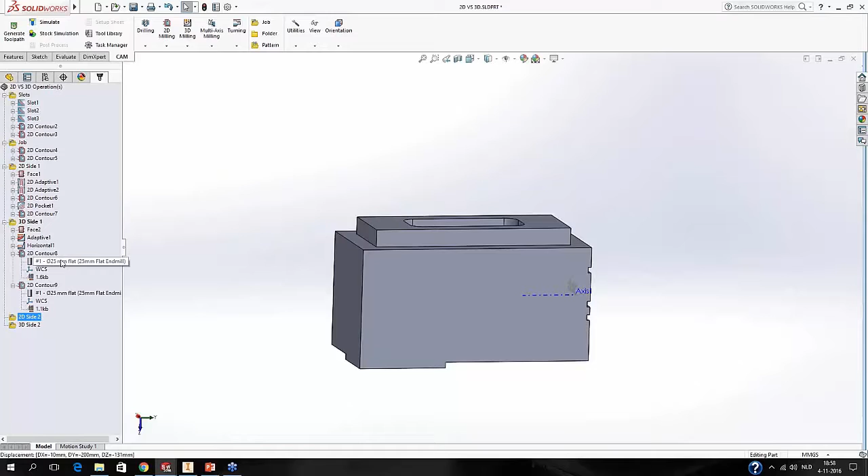In HSMWorks you can drag and drop an operation onto a surface and have a copy geometry too. So that's along the same lines as this functionality. Yeah. Something else we've got with dragging and dropping is copying a tool. We can copy this Diameter 25 tool from this toolpath to the Contour 8 right here.

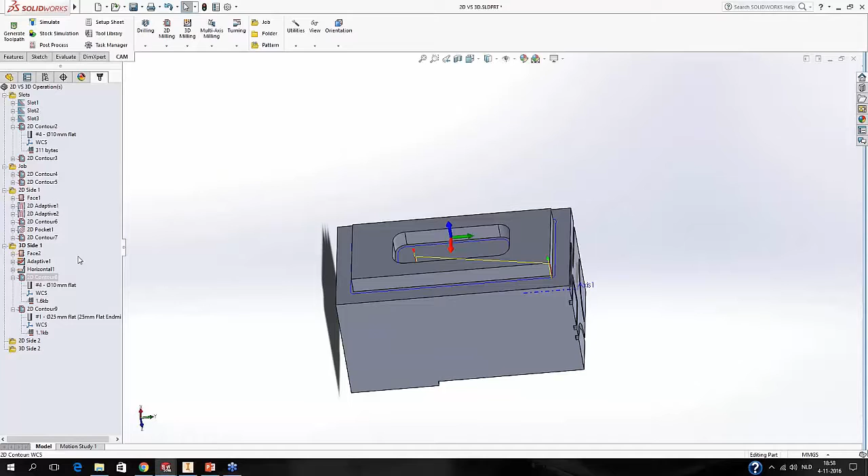Something I use quite often, especially when I work on parts that are machined on different machines. Then I just duplicate the whole setup and start copying tools that are different in each machine and change little things there. This gives me the opportunity to quickly change tools as well. If I found on the machine that for this 2D contour it works, it will probably do for the other one as well. Just copy it over.

We're running out on time here, but Lonnie, another one of our common users on the forum, is asking how you do that drag and drop of selection. So can you select that inner pocket and do a drag and drop of an operation just to show how that works? This one? What do you mean in this case? Am I teaching you something too? Drag and drop a contour onto that.

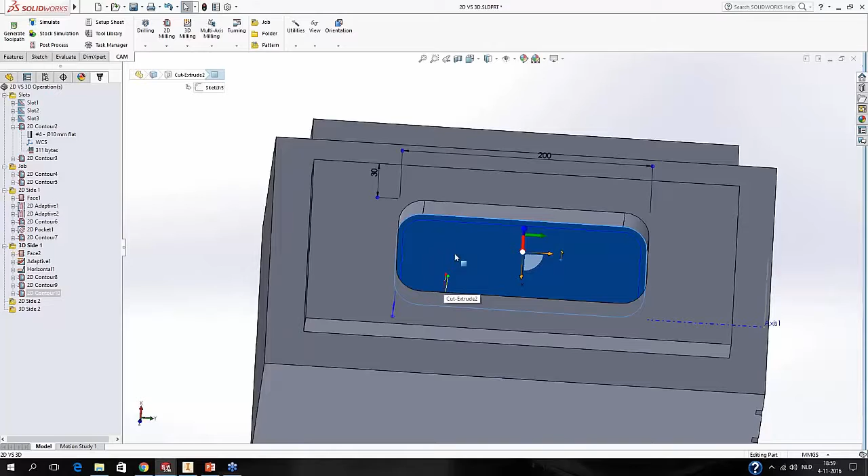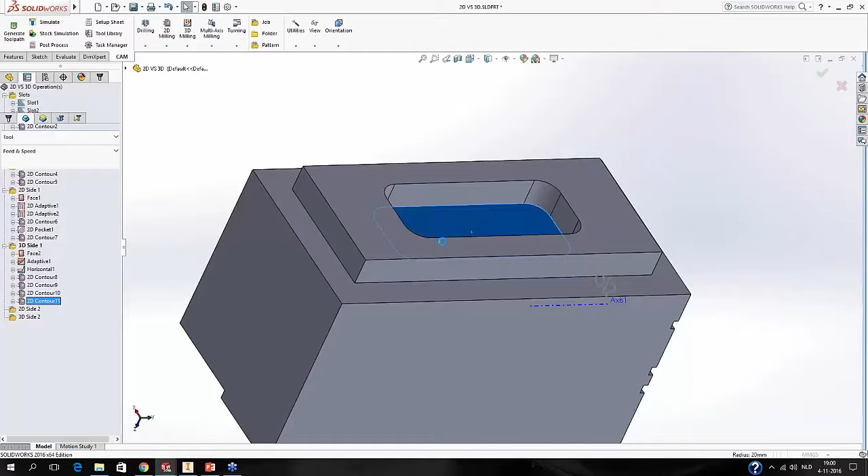Yeah, I like this. Only trick is that we're doing this with surfaces here, and I'm not a big fan of using surface selection with 2D operations, but as long as it's this bottom surface, it will be all right. But you can't use 2D operations with sidewalls, for example. This is a common mistake, and I will show that with 2D operations we can select the bottom surface, which you can see here is now face 2, and we can select an edge.

But if we do this, there a whole lot of stuff might go wrong, and probably will. See, I can't even reverse it at this moment. So this is something that, if you can look at it right now, this is not the toolpath we want, and this is something that a lot of people run into.

So this is good to get out that we can only use bottom surfaces for these 2D operations or 2D lines. Yeah, and it will do tool orientation too. So if it's a pocket from a different face, it will do that.